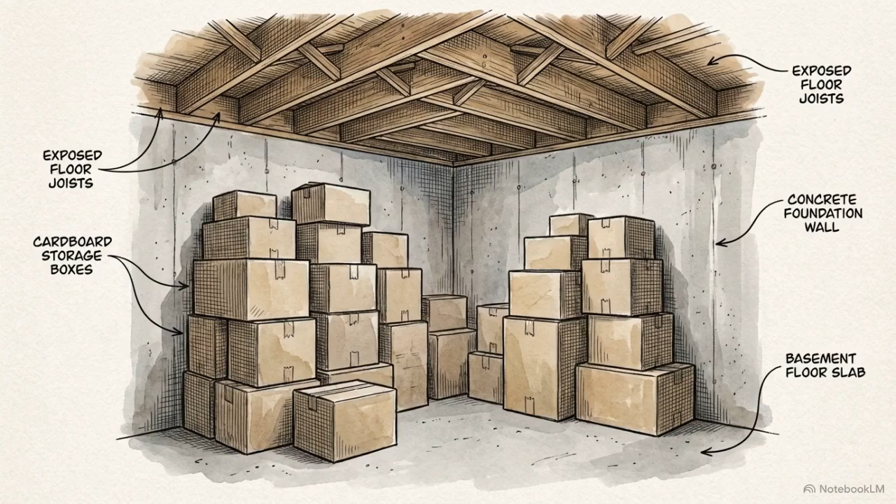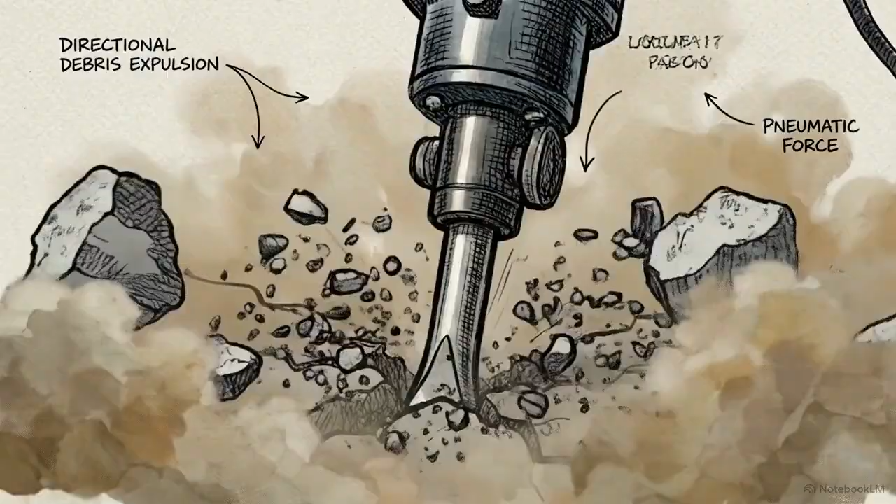Picture that empty corner of your basement or garage. You can probably already see the pristine guest suite, the added property value, and the perfect spot for a new bathroom. Normally, putting a toilet below your main sewer line means renting a concrete saw or a jackhammer, tearing up the slab, and digging trenches just to find a drain line. It is loud, dusty, and incredibly expensive.

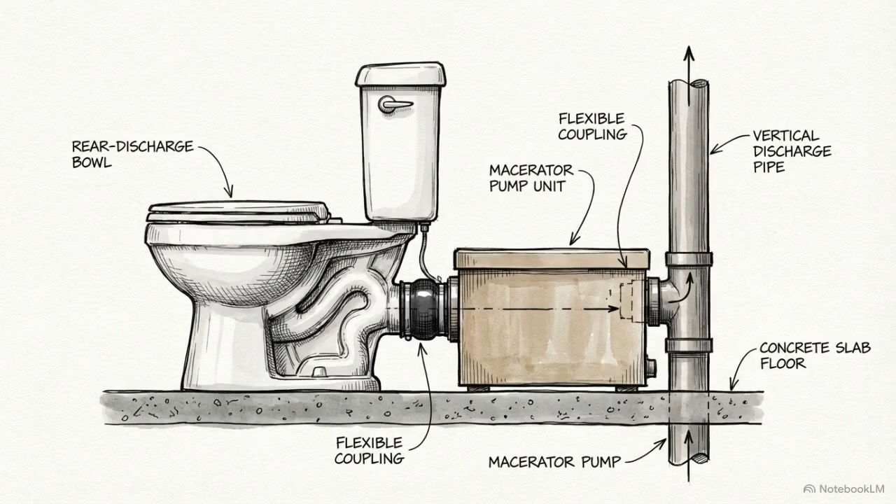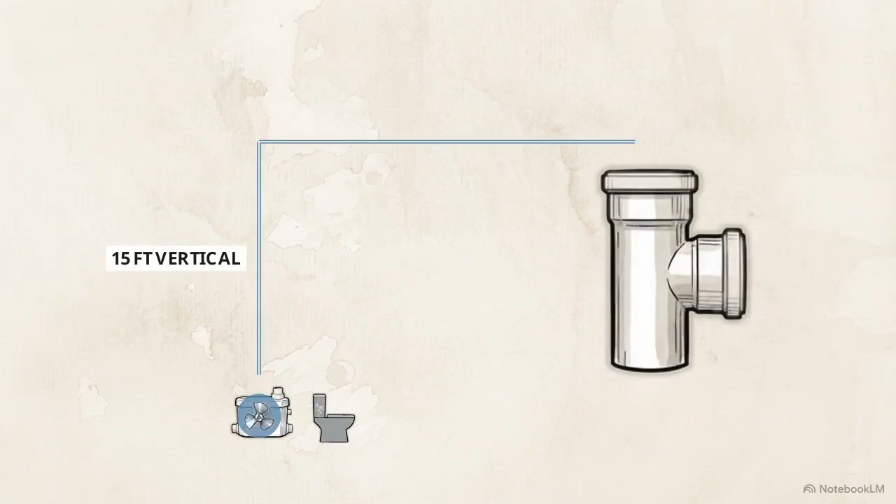Instead of fighting gravity, you can use a pressure-driven system called an Upflush or a macerating toilet. It houses a high-powered grinder that liquefies waste and pumps it out, skipping the excavation process entirely. These industrial-grade pumps are strong enough to push that liquid waste up to 15 feet vertically and 100 feet horizontally, all through a tiny 3/4-inch discharge pipe.

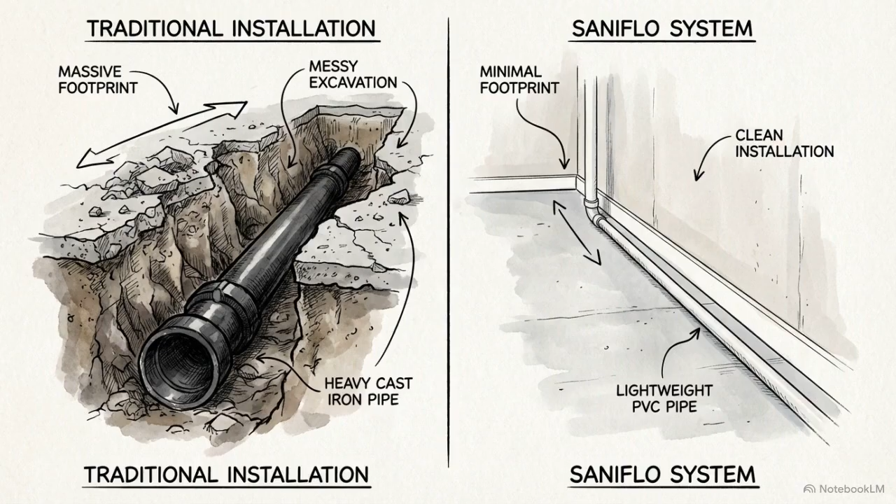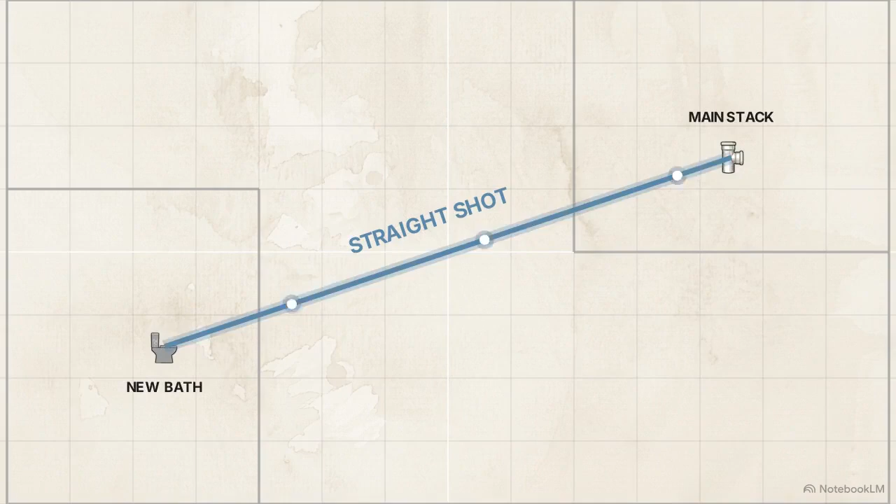By relying on pressure rather than a downward slope, you can reclaim your unutilized square footage without doing structural damage to your home's foundation. Step 1 is deciding where to put the unit. The pump is a mechanical device, so you want to minimize wear and tear by placing it where it has the shortest, straightest possible path to your main sewer stack. Once you have your spot, you need to firmly bolt the white macerator pump securely down to the concrete floor. Keeping it anchored prevents vibration from shaking the components and wearing out the motor over time.

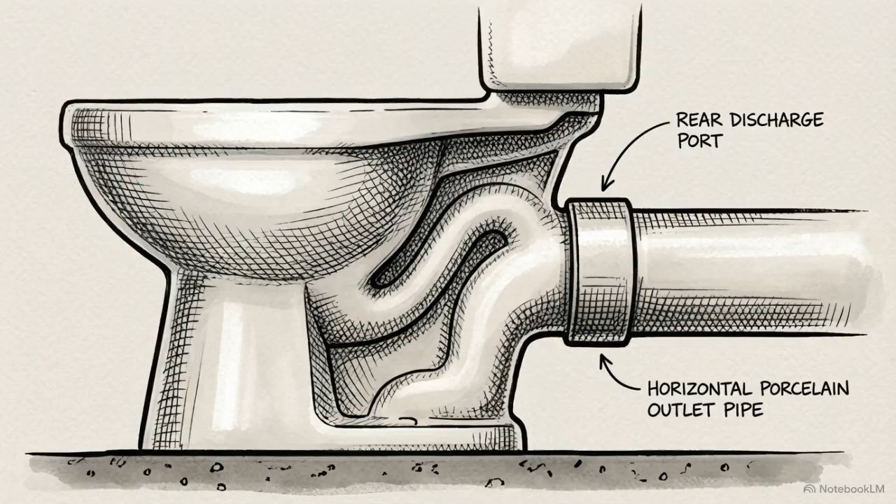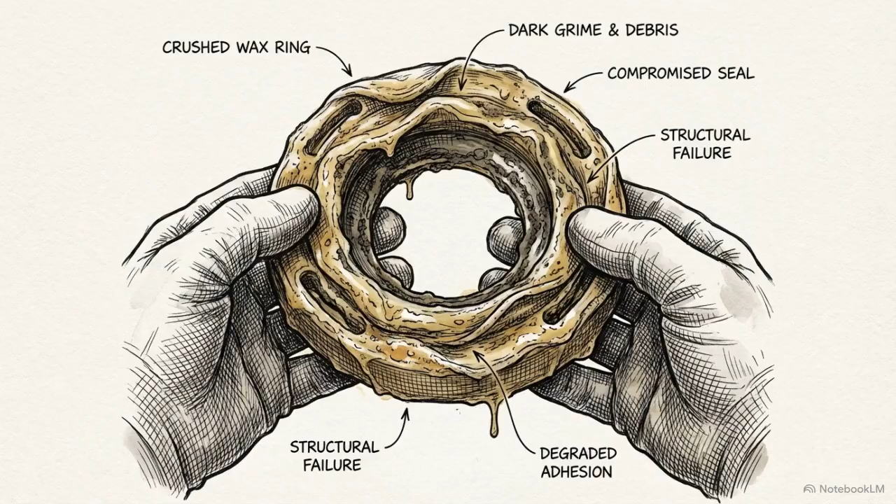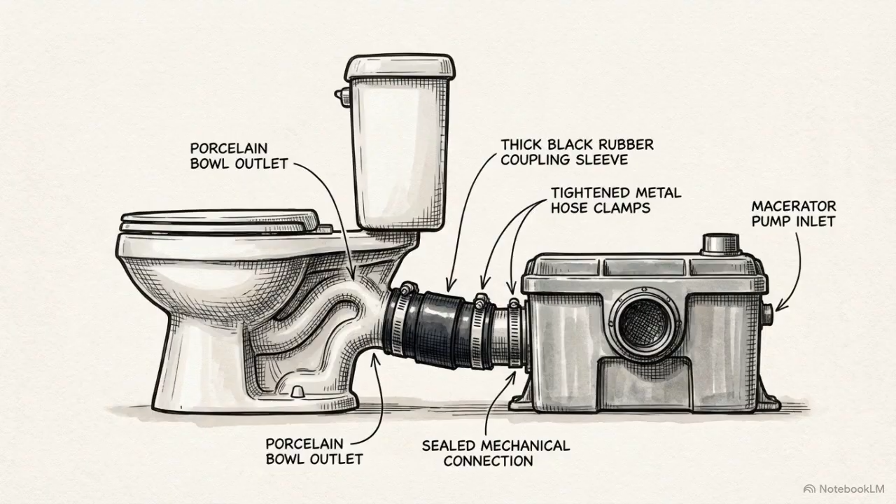Step 2 is connecting the porcelain bowl. Unlike a standard toilet draining down into the floor, this toilet drains horizontally out the back. This design completely eliminates the need for a sticky, messy wax ring. Instead, you slide a heavy-duty rubber coupling over the straight pipe coming from the toilet, connect it directly to the pump intake, and tighten down the metal hose clamps. You end up with a visible mechanical connection. You can clearly see it seal tight, and if you ever need to service the pump, you just unscrew the clamps to detach it.

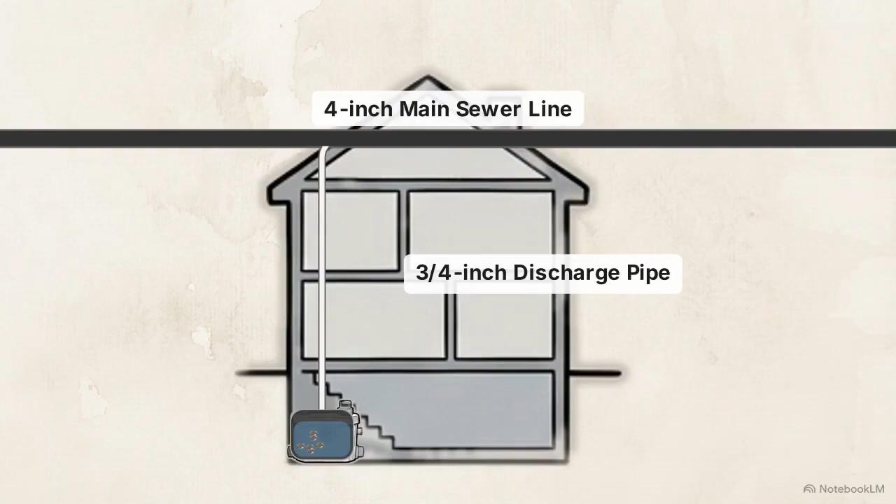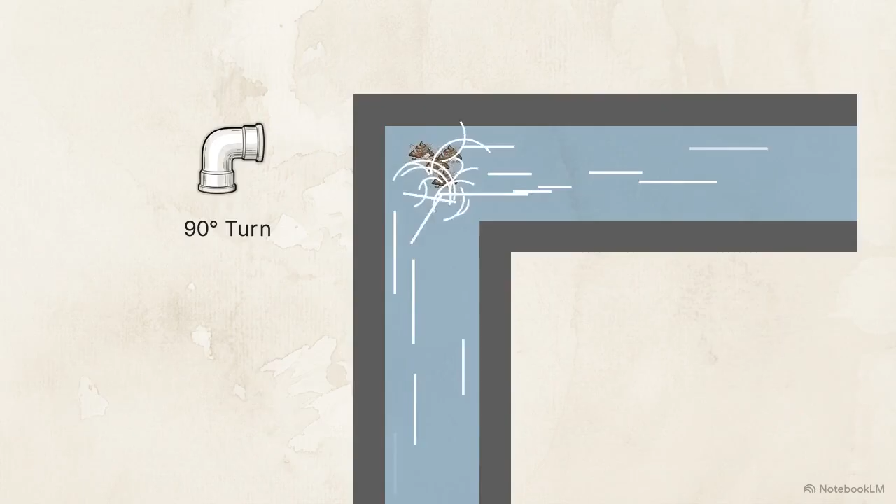Step 3 is the plumbing. You must use a small 3/4-inch pipe for your discharge line. In fluid dynamics, a smaller pipe forces the fluid into a high-pressure jet, maintaining the velocity needed to lift it straight up to your ceiling. When running this pressurized line, you must absolutely never use a 90-degree elbow fitting. A sharp 90-degree turn acts like a brick wall. It instantly kills fluid momentum, causing ground-up particles to settle.

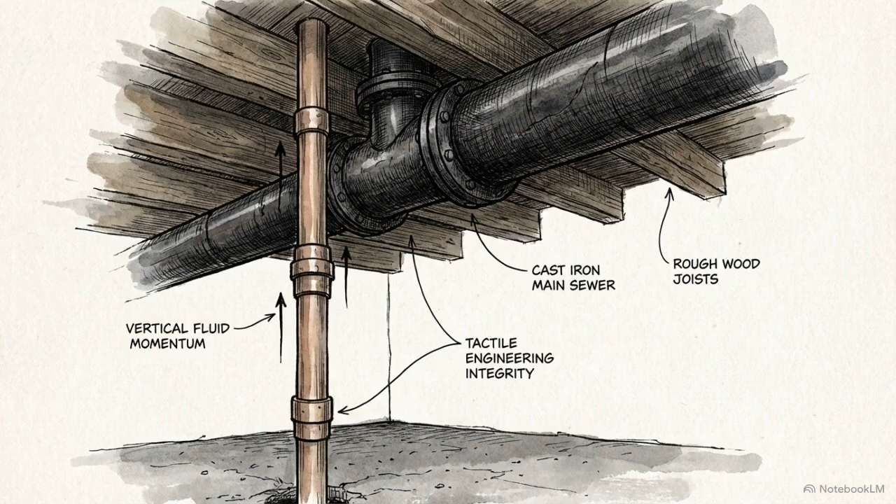Instead, use two 45-degree fittings spaced apart. This creates a long, sweeping curve, like a highway on-ramp. By maintaining a smooth flow through these wide curves, the pump preserves the speed needed to push waste up and into your main sewer line.

Still on step 3, the system needs air. You must install a dedicated 1.5-inch vent line that runs up and ties into your house's main vent stack, placed well above the level of your other plumbing fixtures. Do not try to cut corners with a cheater vent or an air admittance valve. These devices only let air in. This powerful pump requires clear, two-way airflow to operate correctly.

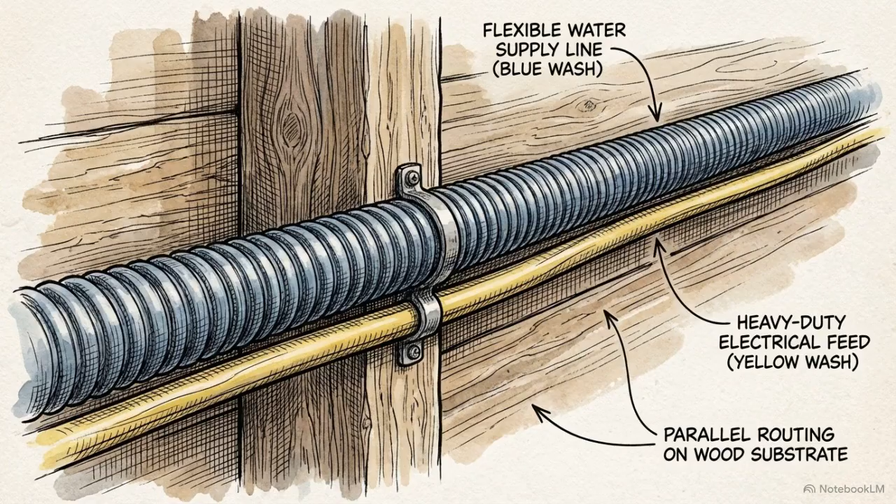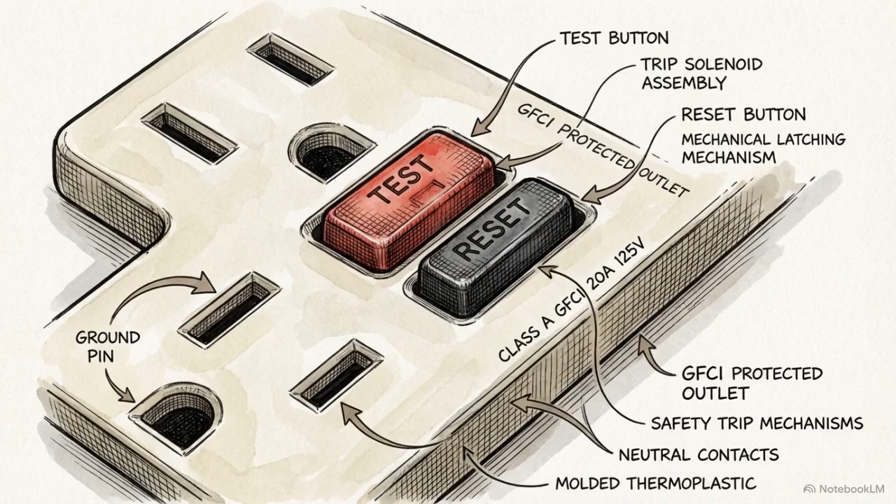Step 4 is hooking up your utilities. For the water supply, you can simply tee off a nearby cold water line using flexible PEX tubing and push to connect fittings. For power, the macerator pump needs to be plugged into a standard 120-volt electrical outlet. That outlet must be a GFCI model. Because you are placing pressurized water lines right next to an electric motor, you need a breaker that will trip instantly at the first sign of a leak.

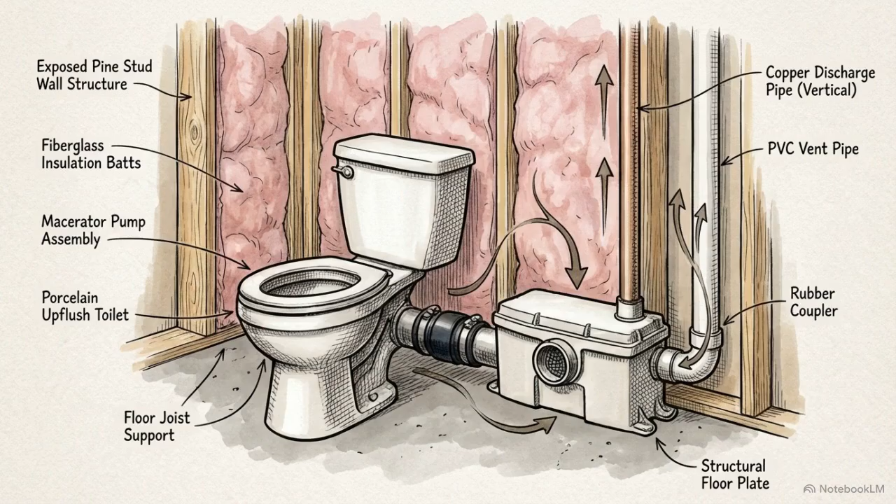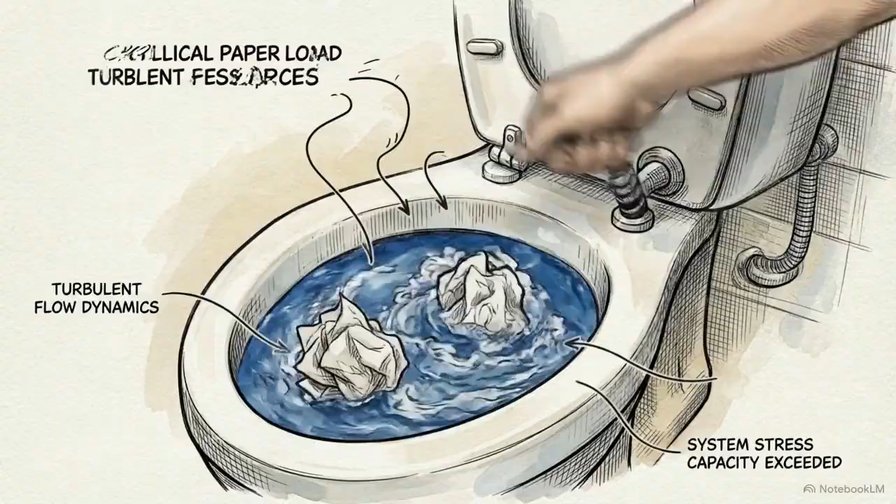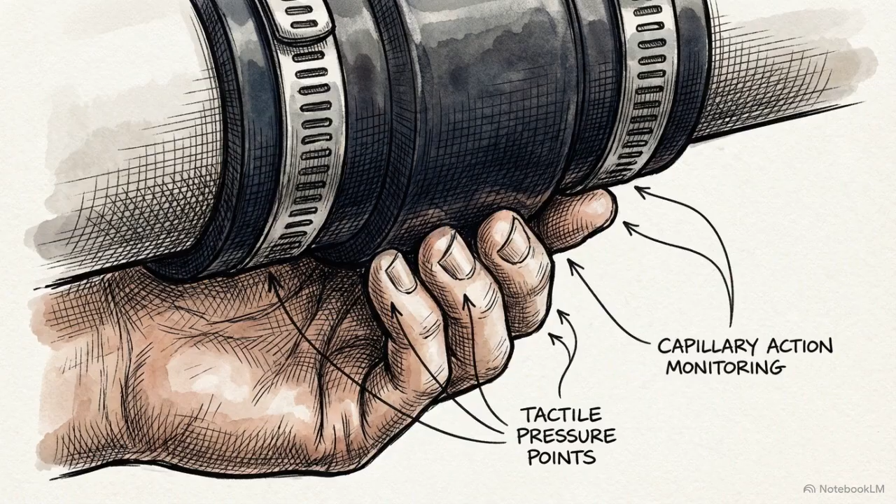Step 5 is the testing phase. Before you even think about putting up drywall or tile, run a rigorous stress test by repeatedly flushing the toilet 10 to 20 times with heavy wads of toilet paper. Listen closely to the motor to ensure it shuts off promptly after the water clears. Then, physically run a dry hand under every single rubber coupling and pipe joint to check for the slightest moisture. Finding a slow drip now, while the wall studs are still exposed, saves you from hidden structural rot and thousands of dollars in drywall repairs later on.

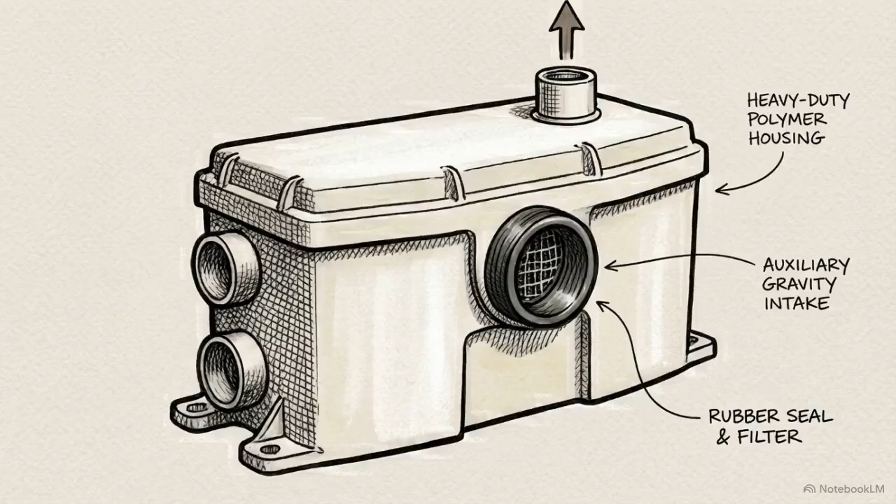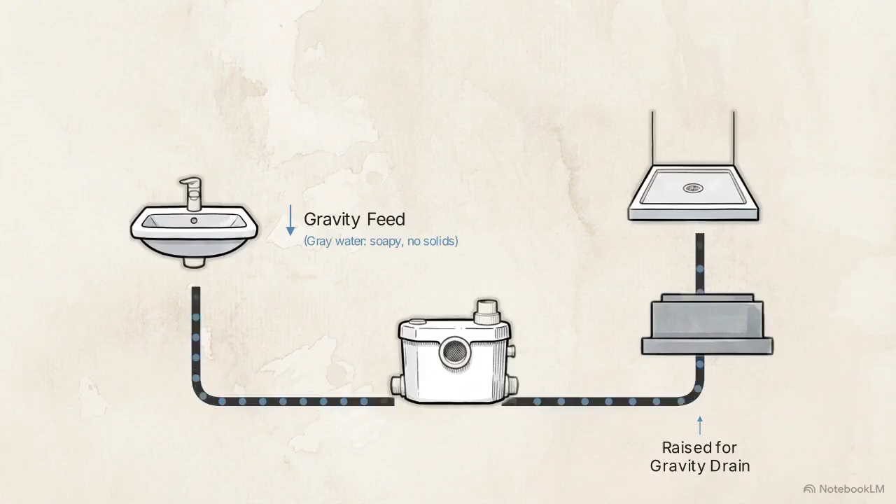Most macerator pump units come with a major bonus feature: extra inlet ports on the sides. These are designed to accept gravity-fed gray water from a bathroom sink or a slightly raised shower platform. Gray water is simply wastewater that doesn't contain biological solids. This means that one pump, using one electrical outlet and one tiny discharge pipe, can seamlessly manage the drainage for an entire 3-piece guest suite.

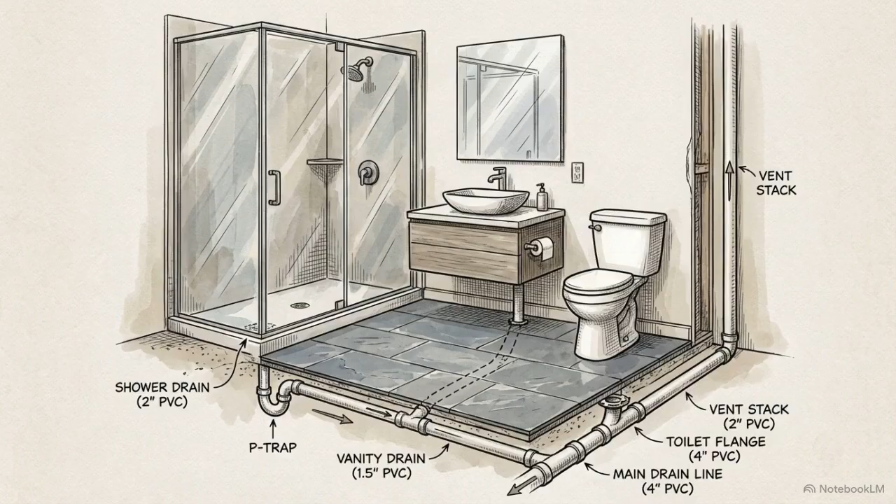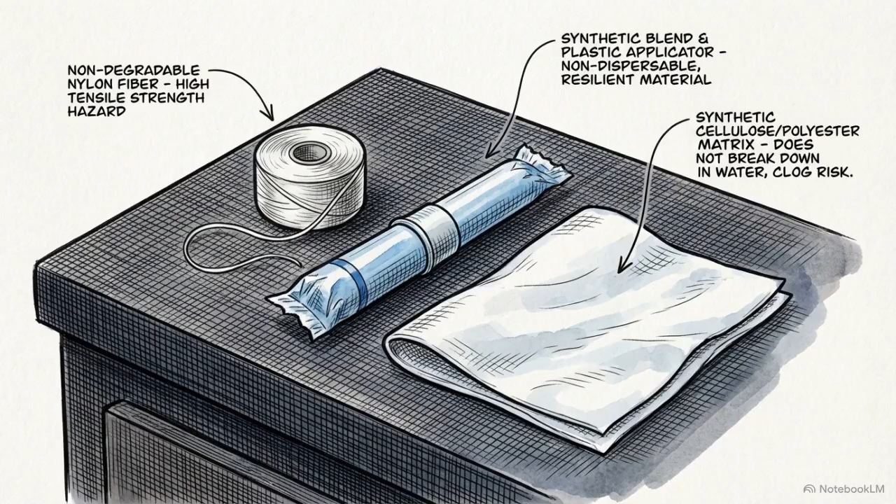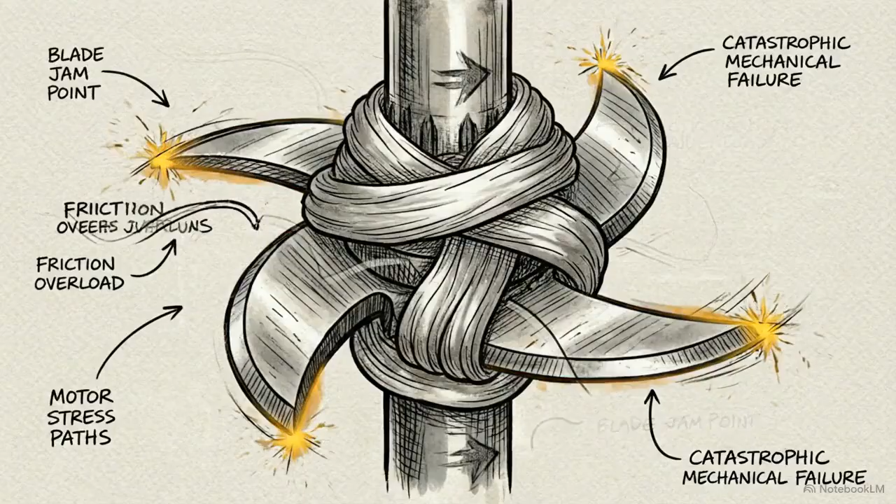But there is one absolute rule for operating this system. You can never flush dental floss, feminine hygiene products, or so-called flushable wipes. Even if the package claims they dissolve, wipes are made of synthetic fibers. Those fibers will wrap tightly around the high-speed stainless steel blades, overheat the motor, and jam the pump completely. Because you might have to clear a jam manually one day, always build a removable access panel or a cabinet door if you decide to hide the unit behind a finished wall.

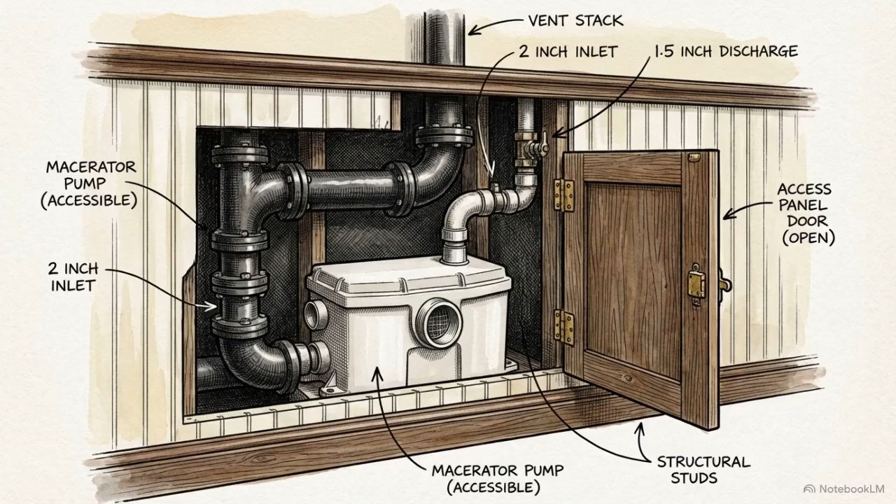By sending wastewater anywhere through flexible tubes instead of heavy, rigid pipes, this modular pumping technology frees your home's layout from the permanent constraints of gravity sewers.